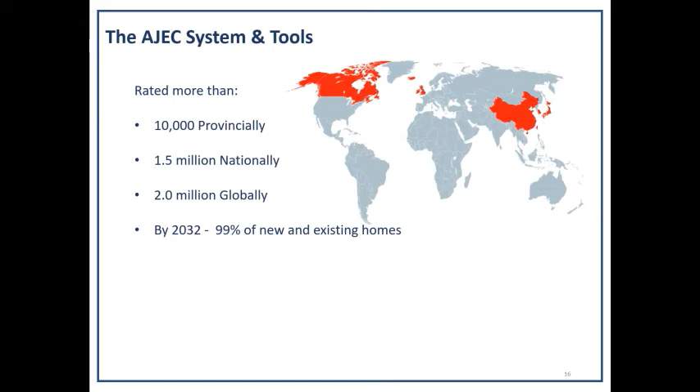By working with us, you'll learn our system and tools. You'll learn how to build cost-effective, energy-efficient, comfortable, durable, and healthy homes. Imagine knowing that you have done something right and meaningful. Do you enjoy this feeling? If you can have this feeling right now, how much is that worth to you? 10,000? 8? 5? 3,000? I will end my introduction here and leave it to you to answer this question after my presentation is over. Without further ado, let us begin learning the 8 secrets you must know about SB12 to win big. Let us all be the other 10% and outperform our competitors without them even knowing it.

During the next 15 minutes or so, we will do a brief SB12 prescriptive compliance path overview. Once we understand the mandatory requirements in the prescriptive path, we can then understand the requirements for the performance compliance path. Finally, we will get to the meat of this presentation, the 8 secrets to using the performance path to win big. Please take a bio break as needed. We will not stop once the training session begins.

If you belong to one of these professions, you should take this training. Architects and designers need to know how to design to comply with the energy efficiency requirements of the building code. Building officials would need to know more than anyone else in order to properly perform plans review and on-site inspections. Myself, as an energy advisor, should know more so I can help my clients get what they need and make their project a successful one. Homeowners who are thinking of doing a house addition, today is your lucky day. You'll learn 3 different ways to comply with the building code requirements.

HVAC designers are impacted by the way we're designing and building our houses. Depending on how we choose to comply with the building code, their work will be impacted by our choices. Manufacturers and suppliers should keep their knowledge base up to date. Otherwise, selling outdated or non-compliant product can be a huge liability. Realtors, the more you know, the more added value you can offer to your clients, resulting in more sales. Renovators, general contractors, residential builders, and developers, needless to say, all these people live and breathe this information on a daily basis. Knowing your options will always benefit you both mentally and financially.

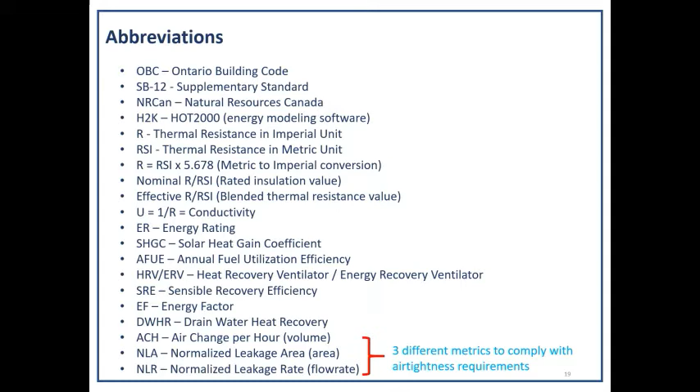NLA, normalized leakage area. It is an estimate of how big of a hole the building envelope has. NLR, normalized leakage rate. It is a measure of how much air is coming through or leaving these holes through the building envelope at a specific pressure. Like the other components, for air tightness compliance, you only need to meet one of the three metrics mentioned above, not all of them.

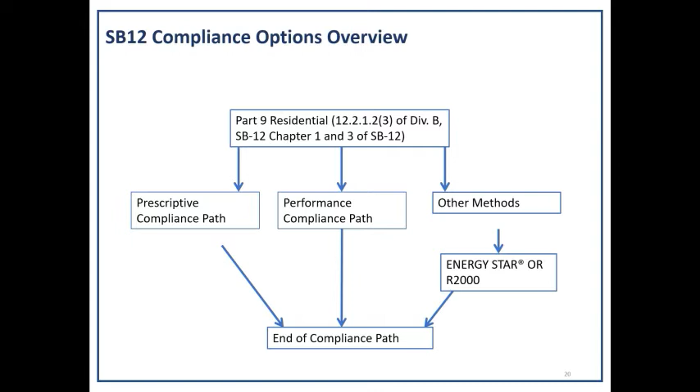There are three ways to comply with Part 9 of the Building Code. Prescriptive and performance compliance are two of the options. Today, we will not discuss the other methods. We will discuss Energy Star for new homes and other programs on a different occasion. There are many roads that lead to Rome. Either path above will get you there.

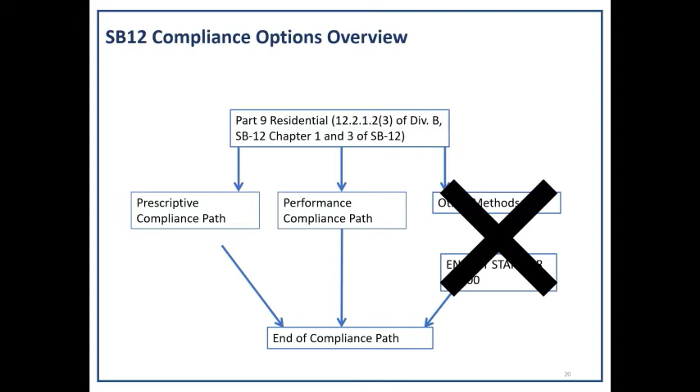Please note that for the first time in history, OBC SB12 has brought us different equivalencies to comply within the same component. Minimum nominal RSI. Max U, minimum effective RSI. If you forget what they meant, please refer back to the earlier slides. In general, nominal is always greater than effective due to thermal bridging.

Looking at the example on this slide, R60 attic has an effective R of 59.22. The math shown here is another illustration of the relationship between R, RSI, and U. U equals 1 over R effective. So 1 over 10.43 RSI equals 0.096. To convert RSI to R, multiply RSI by 5.678. Therefore, 10.43 times 5.678 equals 59.22.

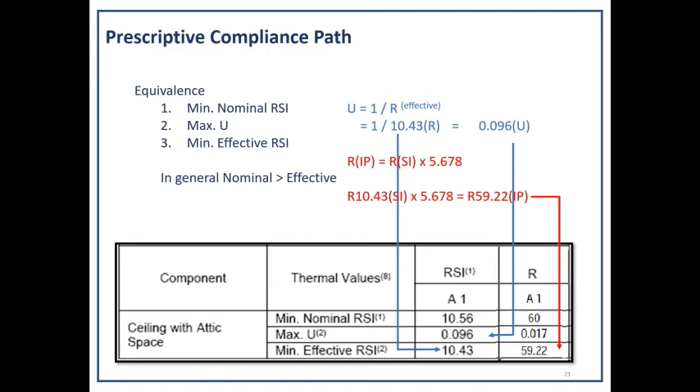Table 3.1.1.2.A, Zone 1. Compliance packages for space heating equipment with AFUE 92%. Zone 1 includes places that have a heating degree day less than 5,000. This includes most of Southern Ontario and a majority of my client base. After December 31st, 2016, this is the table you must follow today if you are planning to submit a new building permit. There are 6 prescriptive options you can use for meeting compliance, A1, A2, A3, all the way to A6.

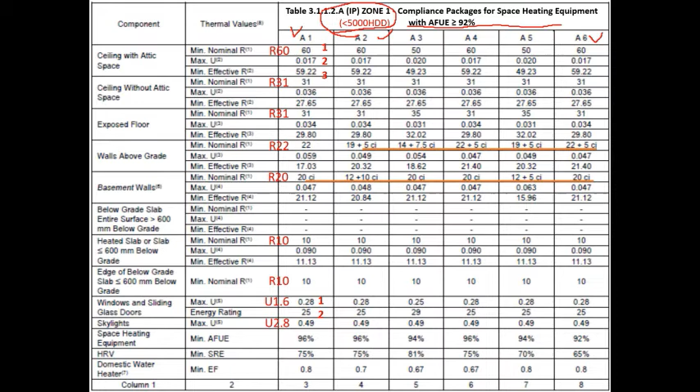If you're using a combo system, one appliance that does both space and hot water heating, you must follow the A4 requirement. In Ontario, most builders follow the A1 package, and I will explain why shortly. To comply with A1, you must follow all the components shown on the chart. Starting from the top, ceiling with attic space, all the way down to domestic water heater.

Once again, you can comply with the ceiling with attic space by meeting any of the 3 thermal values listed on the chart. Understanding these options is like learning 3 different languages: English, French, and Mandarin, for example. This means as long as you show your component for the ceiling with attic space is R60 or U 0.017 or R effective 59.22, such assembly is deemed compliant.

For ceiling without attic space, you'll meet compliance when the component is either R31, U 0.036, or R effective 27.65. Pretty straightforward, right? Looking at the exposed floor, you'll meet compliance when the component is either R31, U 0.034, or R effective 29.8.

Now, let's hold for a second here and think. Why does R31 applied here get a higher R effective compared to the ceiling without attic space? This discrepancy is due to how we calculate the impact of thermal bridging for different assemblies. More wood is less room for insulation, therefore lower effective thermal performance of the assembly. So far so good? Great.

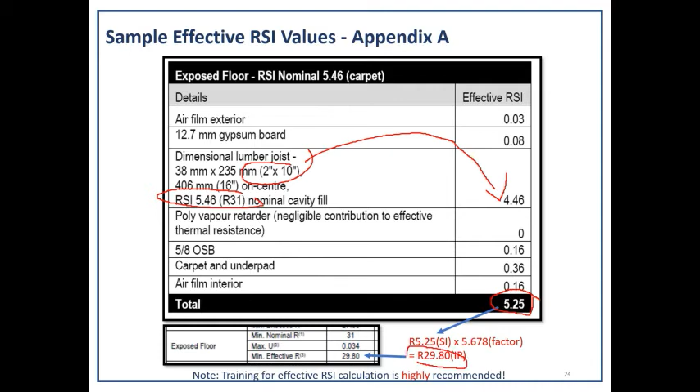Without doing these complicated calculations, SB12 already gives us some flexibilities in wall options. For an example, where you need to install R20 CI for your below-grade walls, you're allowed to use R10 CI plus R12 batts instead.

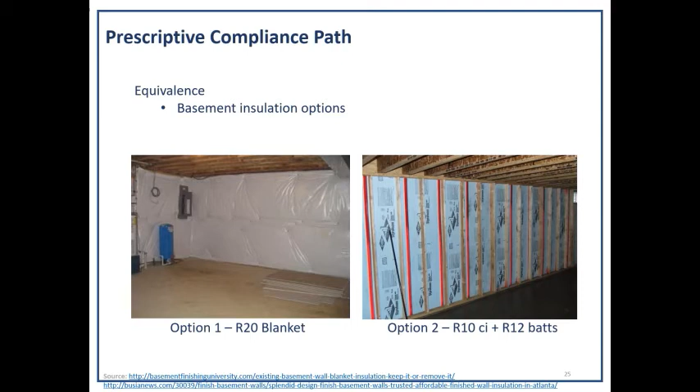Although these assemblies are deemed equivalent, they do not perform the same. Here's why. When you perform the effective RSI calculations for these assemblies from the previous slide, you will see that the total effective R value is slightly higher for the R20 blanket option. In case you feel lost here, don't worry, this is not something I expect you to understand right away. Just remember that each wall assembly performs differently if the construction configuration is changed.

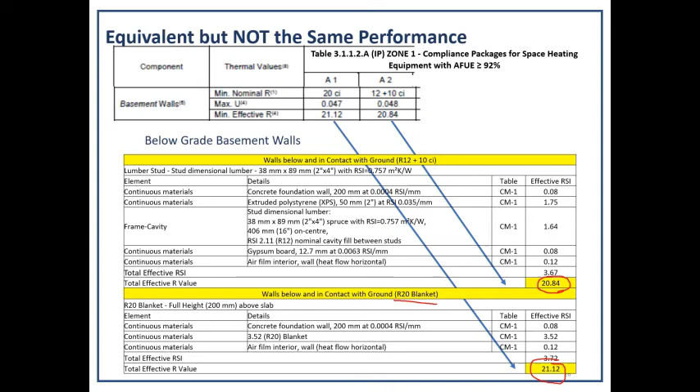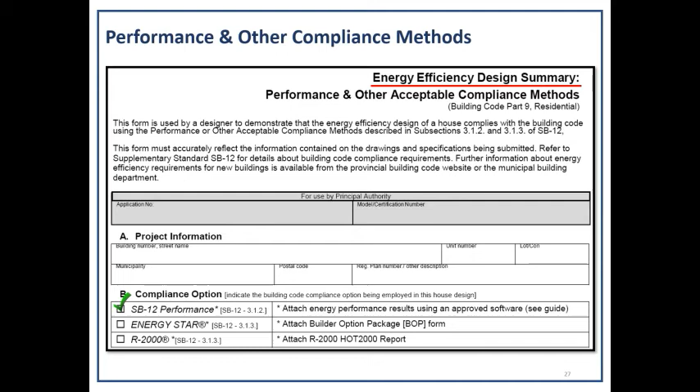So the question comes, what are the rules I must follow for this path? Yeah, this is where all the fun begins. As Albert Einstein once said, you have to learn the rules of the game and then you have to play better than anyone else. So here are the rules. Rule number 1. The first rule requires you to estimate the annual energy consumption of both reference and proposed building design, expressed in gigajoules.

Rule number 2 says you also need to compare identical buildings so that it is an apple-to-apple comparison. Sometimes, when your design is over 22% window-to-wall ratio, let's say 30% for example, the proposed building design will include all of the windows in the energy simulation report. The reference building will only have 22% window-to-wall ratio in the report.

This is to ensure that homes with higher window-to-wall ratio will still be just as efficient as the building code minimum by increasing the energy efficiency of the other components of the house. For example, adding exterior insulation onto the exterior walls to compensate for the increasing energy consumption due to a larger window area.

The third rule asks us to prove that the energy consumption of the proposed building design must be the same or less than the reference building design. If the simulated annual energy of the reference building is at 100 gigajoules, then the proposed building design must be 100 gigajoules or less.

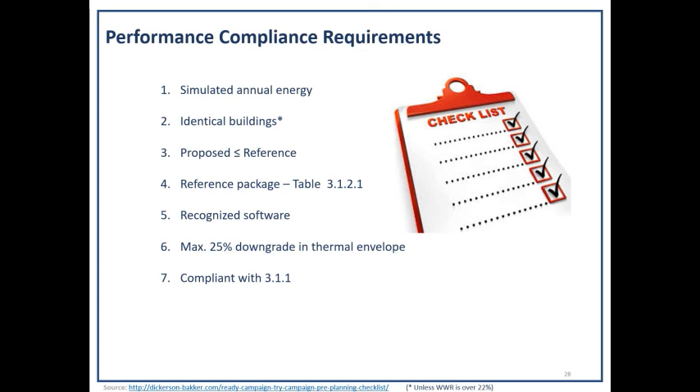Finally, the last rule states that the proposed house must comply with all the requirements stated in Section 3.1.1. For example, if your window-to-wall ratio is between 17% and 22%, the performance of your windows must be upgraded to the next performance level from the basic requirement. Let's say you were going to use A1 as an example. The window performance requirement should be either U 0.28 imperial, U 1.6 metric, or ER 25. The next performance level would be U 0.25 imperial, U 1.4 metric, or ER 29.

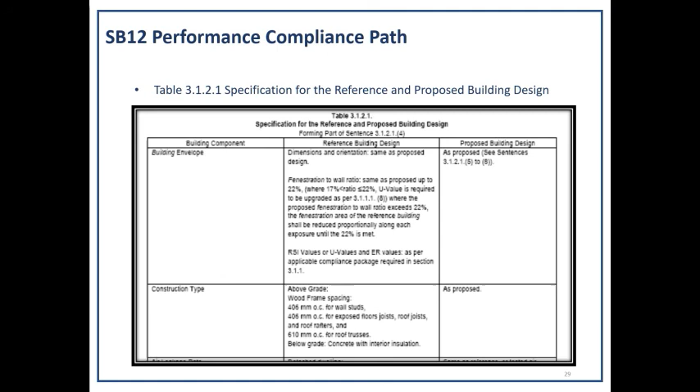In addition to the 7 rules I mentioned in the previous slide, Table 3.1.2.1, specification for the reference and proposed building design, lists all the permutations and restrictions one must follow in order to comply with using this method. It gives you very specific guidance on how to model your reference building and the proposed building design. For example, the wood frame stud spacing for above grade walls in the reference building design must be 406 mm, which is 16-inch on center. Also, occupant loads, internal gains, and operating conditions for both designs must be the same.

Now that you know the rules, let's play it better than anyone else. This is how I play the game. These are our 8 secrets on SB12 you need to know to win big through the AJ Easy Way. All these strategies are created to provide practical solutions to real-life applications.